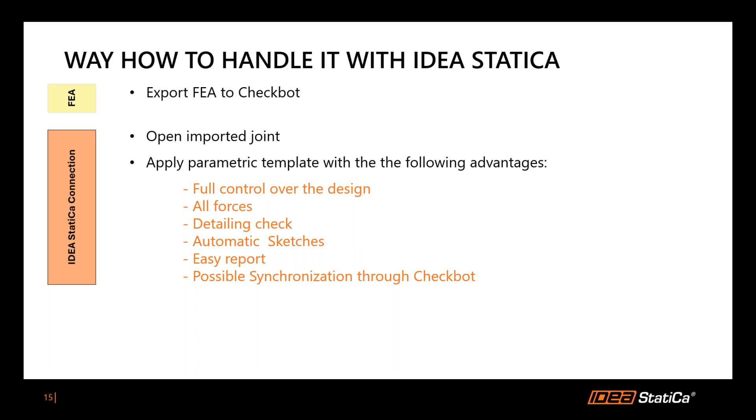We can export the structure to Checkbot, and now we open the imported joints and apply our templates with the following advantages: we have full control over the design, we have all the forces in the joints, we have detailing checks also included, we even have automatic sketches in our application, we can easily create a report, and of course we have possible synchronization through Checkbot if any changes in the structure appear.

And regarding post-processing, we export the connection report very easily. For the checkers and for the 3D CAD detailers, we can export either .ideacon for viewer, or we can even create an IFC file to see the position of the joints and how they look.

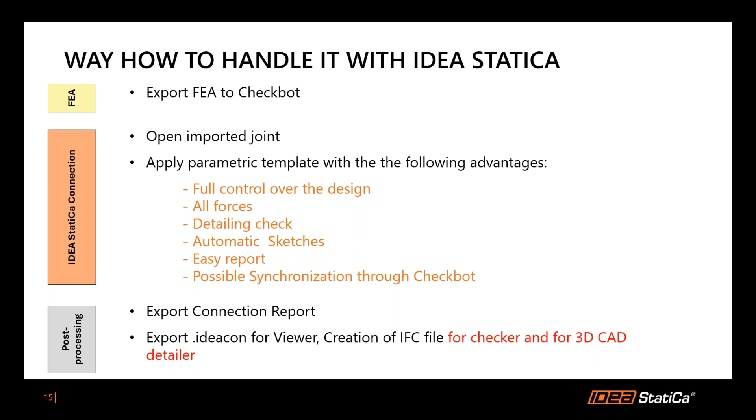And now I will show you how it works in IDEA StatiCa. So let's go out of the presentation and jump directly into the software.

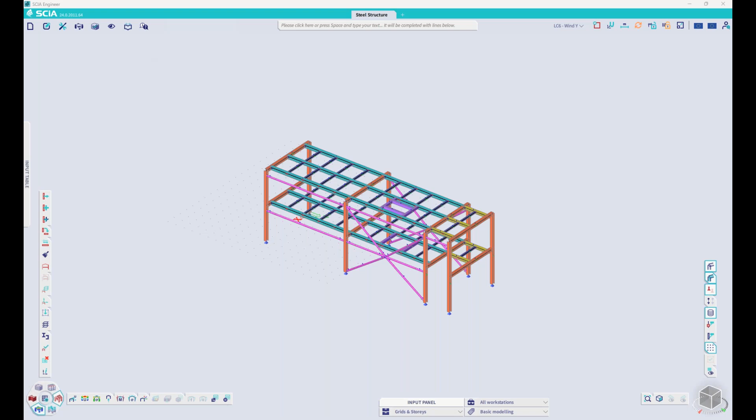So I have prepared a small structure in SCIA Engineer. It's already computed, so we will jump into the IDEA StatiCa Checkbot. And here it is - you see the whole structure is imported into IDEA StatiCa Checkbot with all these joints we have here in the tree.

Let's start with, for example, this joint. So I will open it. It takes some minutes, but it's here already.

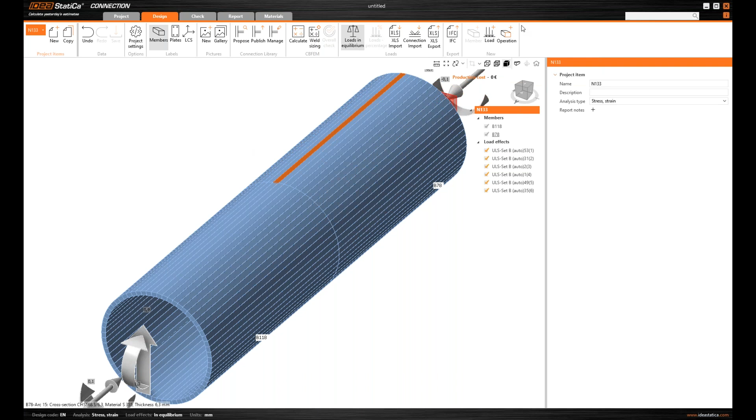And I have two possibilities. The first, standard possibility, what we had before version 24.1, we applied a standard operation to it. So I will show it only as an example of how to make it in the standard way.

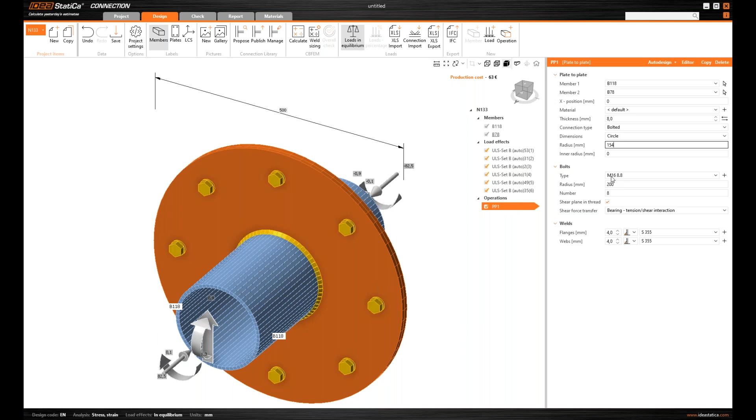And here I will change it a little bit. So, thickness 8, then here I will put 154. Here I will add the bolts with diameter 12. Radius 119, and here number of bolts, 6 bolts.

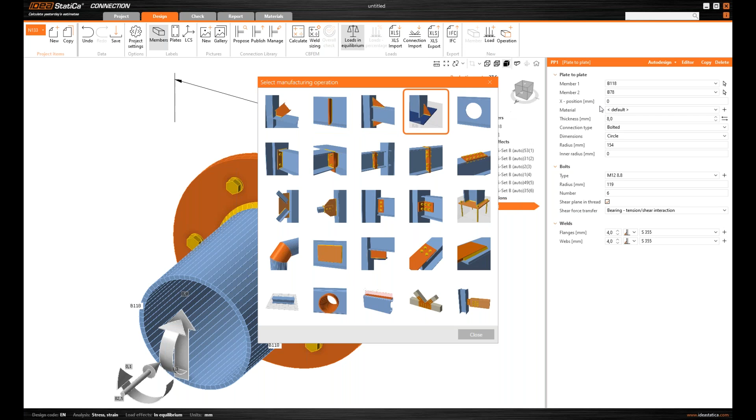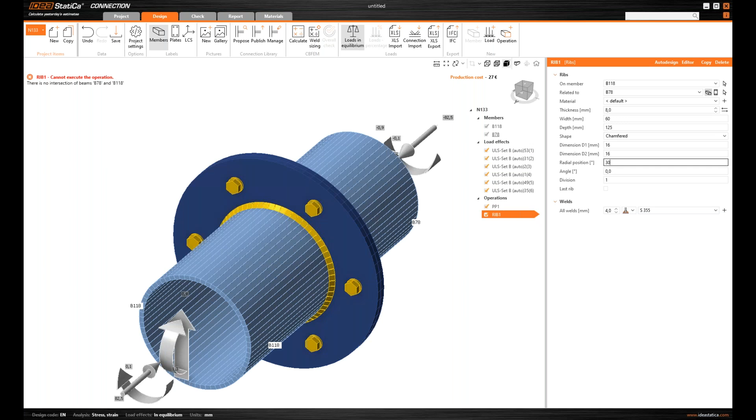So then I have to put another operation. This is the rib, and it will be here again, changing the plate. Here we can leave 80, 125, chamfered, triangle, chamfered, dimension 16, 16, 30, and 360.

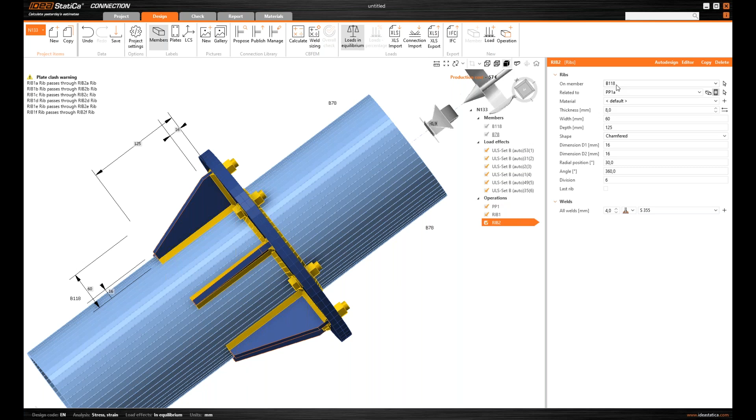It's here, and here we have to change it to the plate. So this one, and here number 6 - 6 ribs on one side, and then for the other side we will copy it and put it on the other side with the plate.

So this is the standard possibility we had before version 24.1, and it takes some minutes. For example, I measured it, and it took me about 1 to 2 minutes to create these 3 operations.

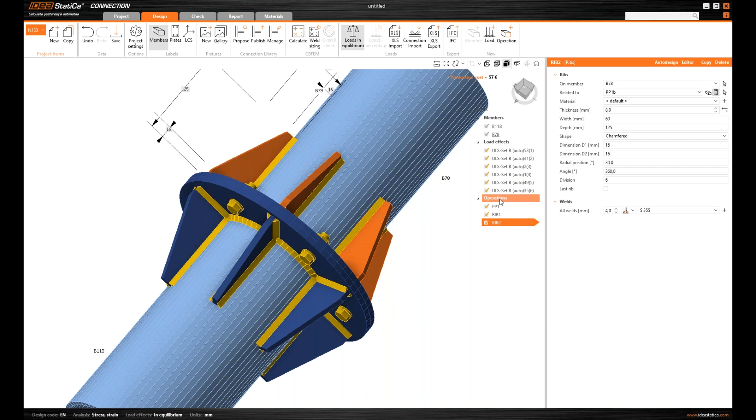Now I will delete it, and I will show you the other possibility which we have prepared for standard connections. A new window opens, and what's important, we now have a tab with a possibility to check the parametric design.

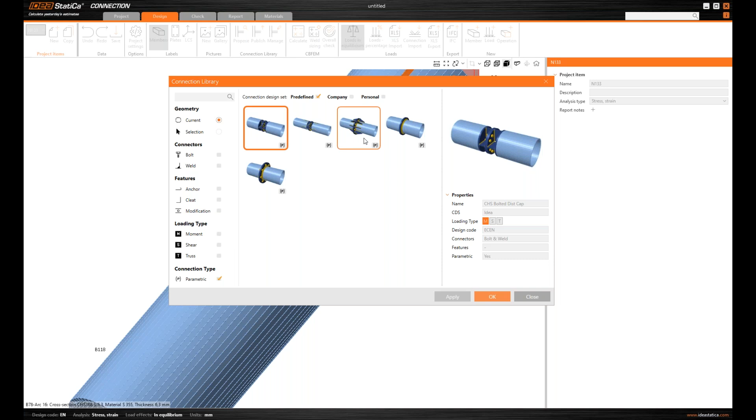In this case, we have some standard connections which can be used with this parametric design. And I will only change the diameter of the bolts. The whole joint was created and designed with one click.

Now, of course, for these operations we have some possibilities. You can see here in the tab on the right side we can change the thickness of the plates. For example, we had 8 millimeters before, and the number of bolts was not 8 but 6. The stiffener depth was 125, as I already added before, and the rest is the same as before.

What's the difference between the operations I had done before and these 3 operations we have right now? The difference is that you are not able to access these operations in the right tab - it's grayed out. So all you can do is apply these parts in the tabs; these are the items you can change, and the rest are not possible.

If there's a need to change something else, for example the welds, they can be accessed in this 3D window. So here you can change, for example, the welds to 5 millimeters, but nothing else.

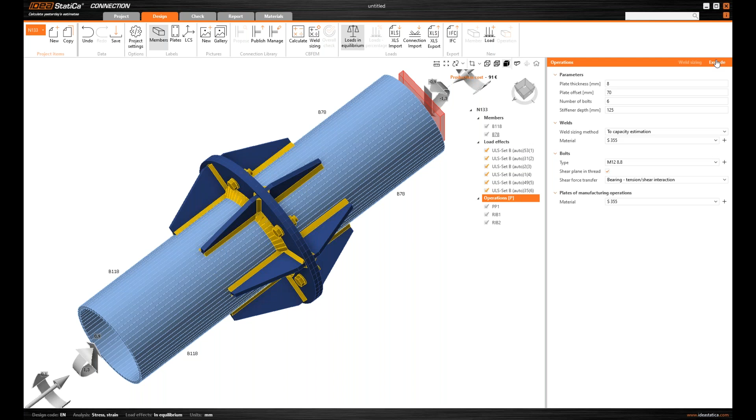In that case, we have done it, and now you see these three operations are accessible and you can change everything you want.

So this is the one example what I wanted to show it to you. Now I can save it. Eventually I can make the computation, but it's not necessary. Maybe I will do it.

For the calculation, if in case you have a lot of load effects, maybe in the tree you have 20, 30 load cases, there's also a possibility we added before: calculate load extremes. In that case, you can see only these 4 load cases are important for this joint. So I will calculate it, and in the meantime, I will show you how this calculation is prepared.

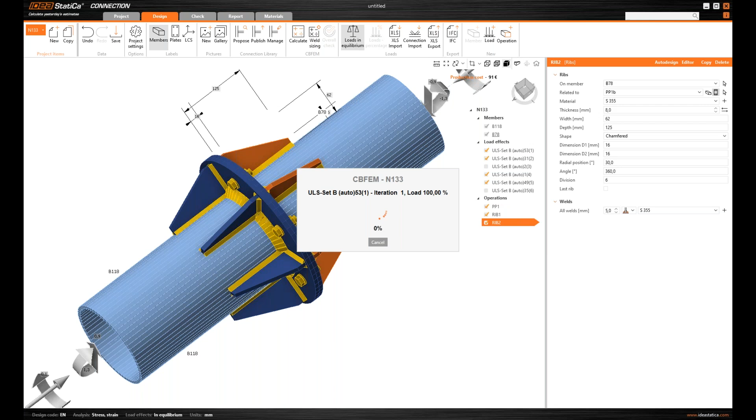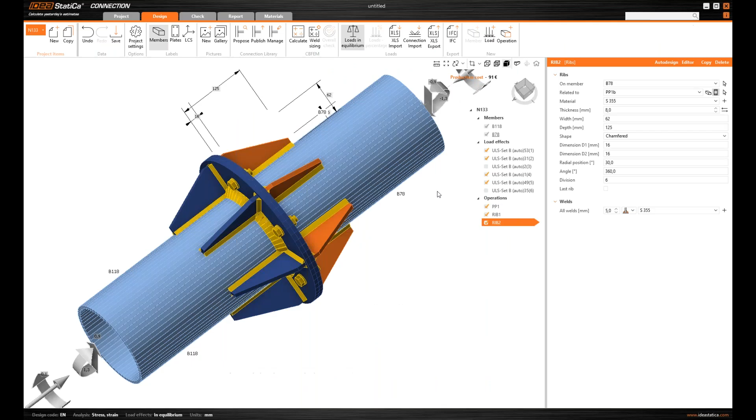We have here on our web pages a knowledge base article called the Load Extreme section. According to these formulas, we are computing the extreme loads which are significant for each joint you are calculating. So you can use this button, what I showed before, to select only the important load cases and make the calculation.

So, okay, it's done. I click on save and close it. So let's go to another joint. For example, I will select this one. This is the footing. Open.

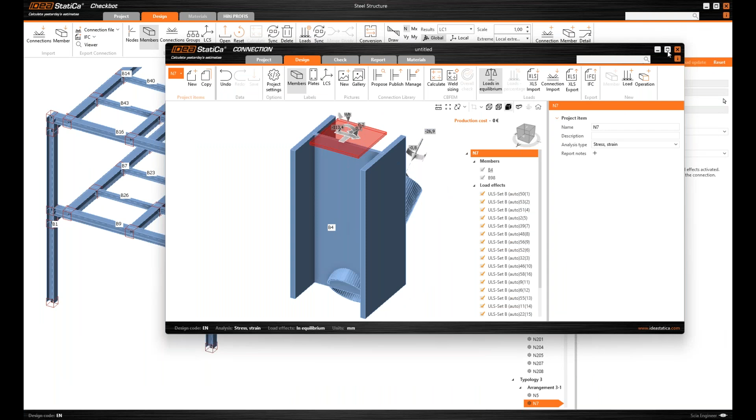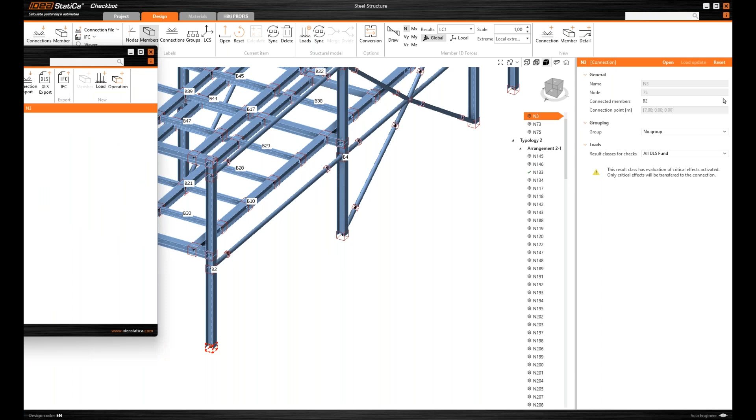So it's here, and again I will try to apply our parametric template. So I will click on parametric. Oh sorry, I took not the correct one because we have others. Not for every joint we have this - all the parametric design is not prepared, but I will talk about it a little bit later. So I will do this simple column and click on propose.

And again, click on parametric, and you can see we have more than one here. I will select, for example, this one. Okay. And well, we can leave it as it is.

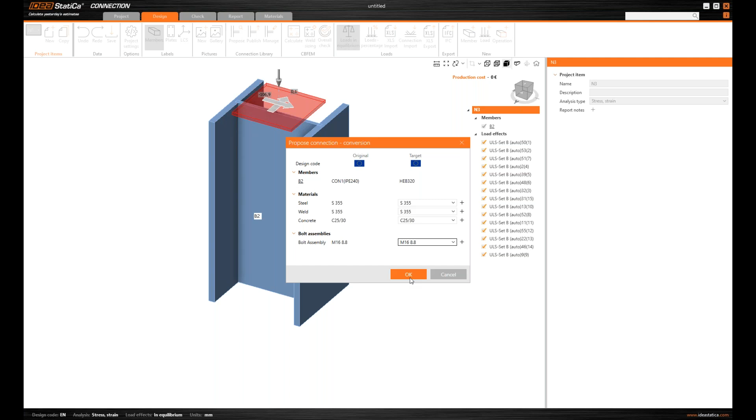So you can see here are much more operations needed to create this footing, so it's really easier to prepare something like that. And here, for example, I can click on widener at web. That means that it will disappear and we can compute the joint as it is right now.

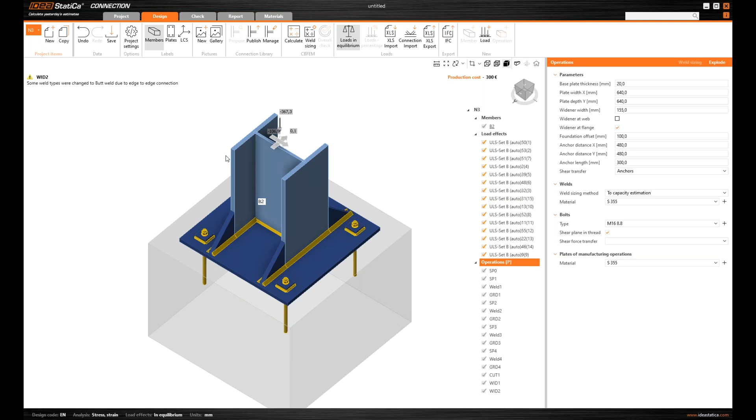In case, as I spoke before, we want to change something, I will explode it again. And for example, we have here these washers with the thickness of 20 millimeters.

Next, a very useful feature what we have right now: you can select using the control button and mouse. You can select all the washers - this one, this one, this one, and the other one. And here I can, at one click, change the thickness of these plates from 20 to 16 millimeters, for example.

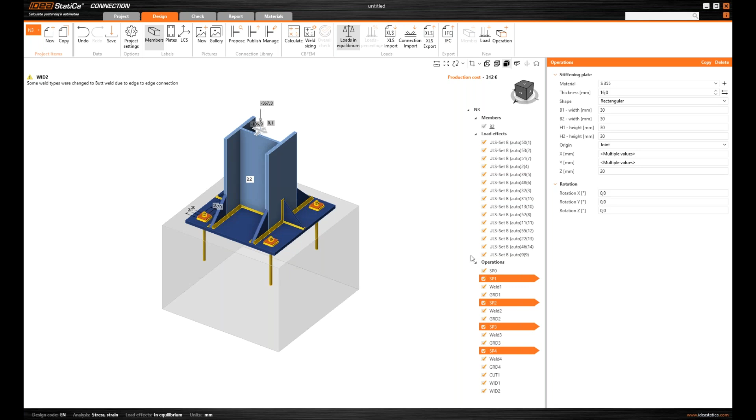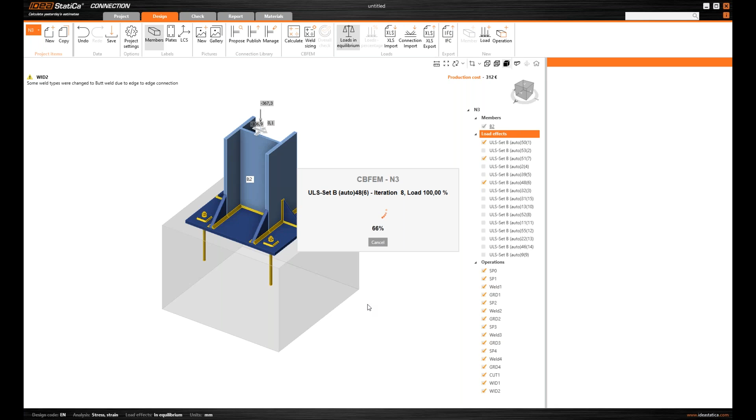So what we would like to show you is what's behind the parametric design, where you can create your own standard connections. We have about 50 parametric standard connections in our software, but you can create also your own.

And how to do so? Maybe I will save it. And how to do so? Close it, and let's go to the

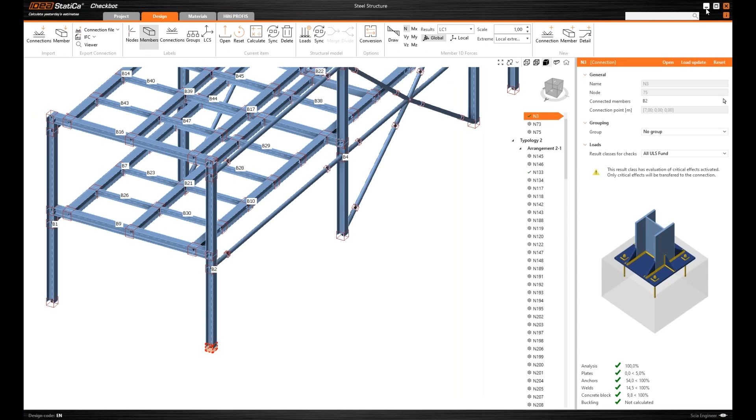Here to this application, and if you click on the preferences, you can click on the developer mode and enable the developer tab in the ribbon. Save. So let's go again to our checkbot, and we will try to show you how it works if we have the parametric developer mode enabled.

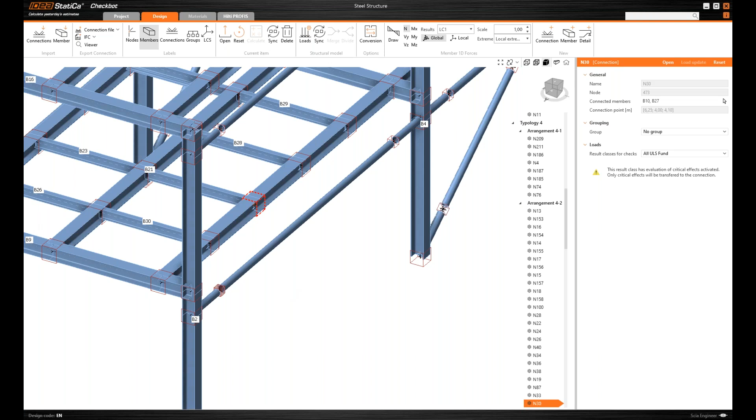So we will open this joint, for example. So here, and we will apply again one of the standard connections with parametric design. This is this one. I can change it, for example, here.

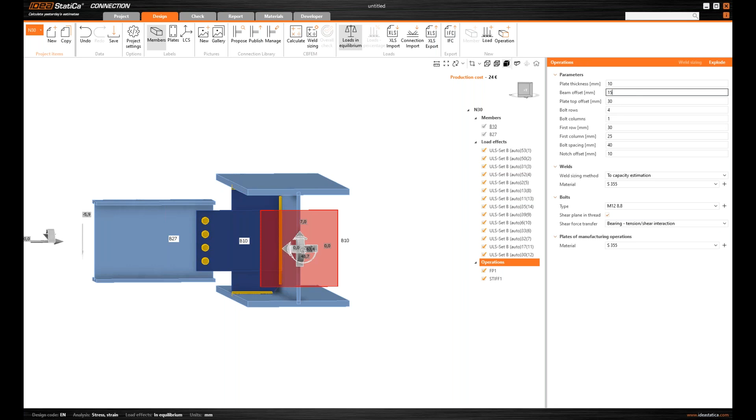And you can see we have here a thin plate. Maybe what we can do is change the offset to 15 millimeters. Yeah, you can see everything happened. And now what's the difference to the standard appearance of the connections.

We have here the developer tab, and in the developer tab right now, you can see the parameters which are responsible for these operations we have here in the 3D model. So it means that right now we have here parameter thickness 10 millimeters. I can change it, make it, for example, 12 millimeters, and click on Set to Model. Then if I go here, you maybe noticed it changed the thickness to 12 millimeters.

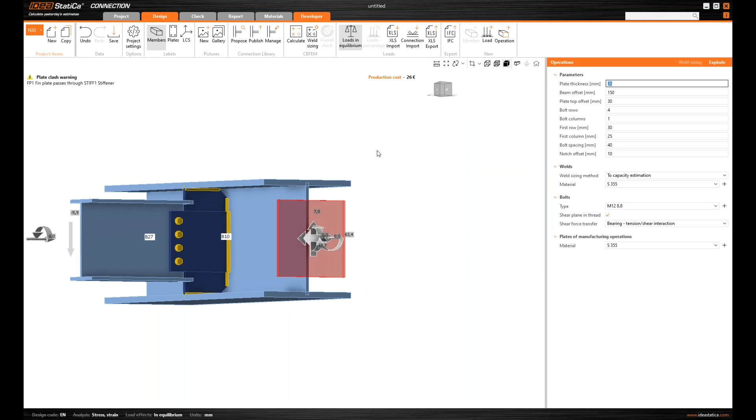And if I go back to design, here you can see the number change from 10 to 12. So this is the way how you can create your own standard connections according to the rules you have in your company and so on.

And for this, we have again small hints for you, and you can find it on our web pages. If you go to tutorials, products, field, and here IDEA Open Model API, you can see here two tutorials. The first one is parametric design in IDEA StatiCa connection basics, and the second one is the same with advanced.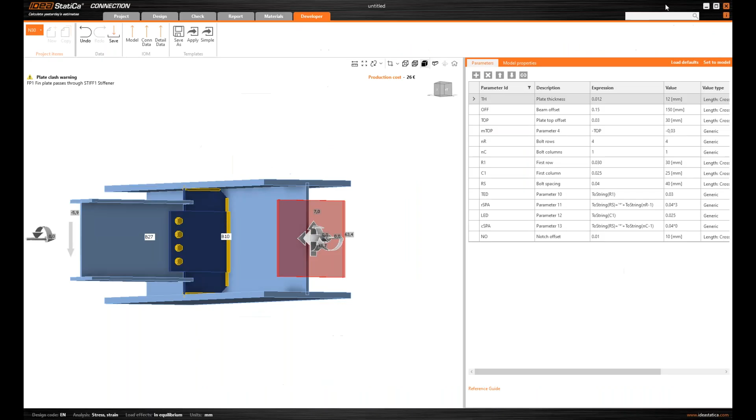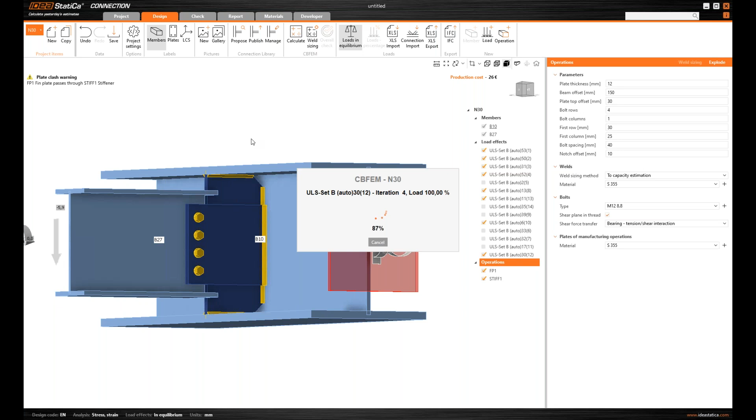And here you can learn all about these functionalities, how to create your own standard connections using the parameters in IDEA StatiCa. So let's go back to our example. We can again make the computation, calculate all, and click calculate. So everything is okay. We can again click on save and close it.

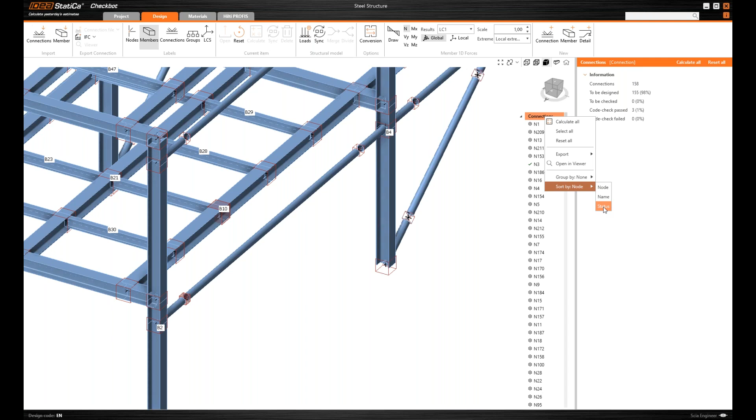So now I will show you another feature we have added to our application. Right now I will click with the right click mouse on none and click here sort by status. And now you can see the first rows are the joints we have designed and calculated. Yes, these three are done by me in the time.

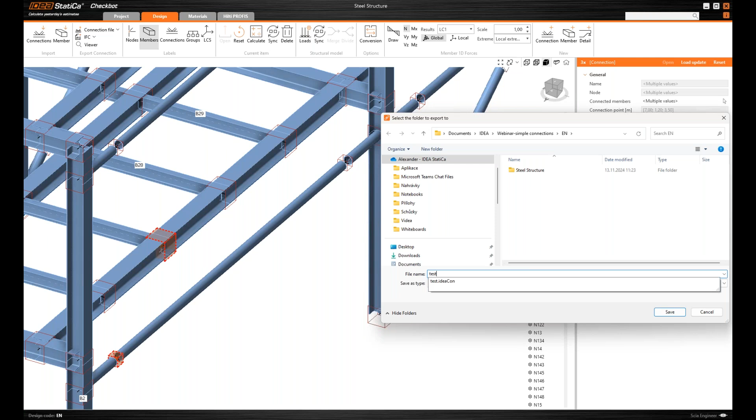And now we have again the possibility, clicking control, select all three joints, click with the right mouse button and click on export. I will click on connection, and maybe here put 'test.' Doesn't matter what name I select. And the same I will do for IFC, and make the same name test. So, save.

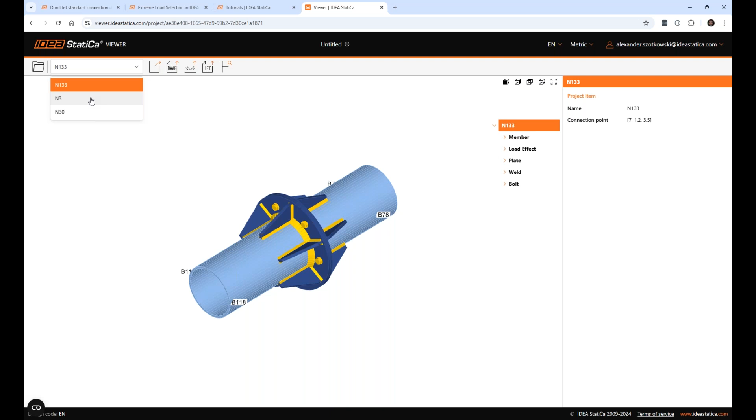And now, what we can do with these files. First, I can click on viewer and select these multiple files with connections. And you can see here we have all three joints in one file, and you can send it to your detailer to look at it.

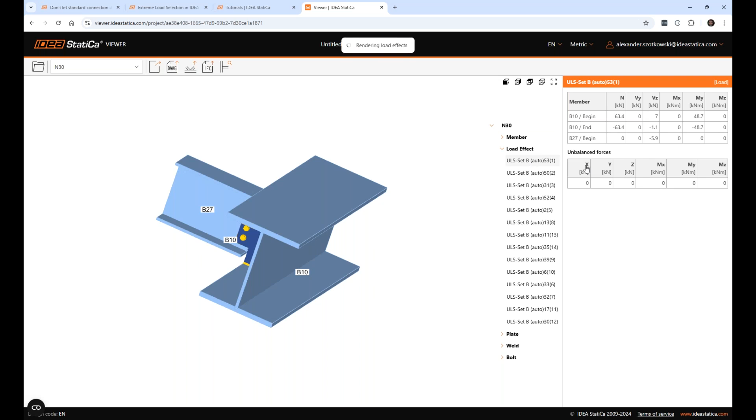It's even with the load effect, so if you click on it, you can see here the load effects we have used for the computation of the joint. So this is the one possibility of what you can do with this file.

And the second one, we have also the... I have to look at it. Cannot find it, sorry for the delay. I do not have it here. Maybe just a moment, please. Excuse me for the delay. I have put it on the other. Just a moment.

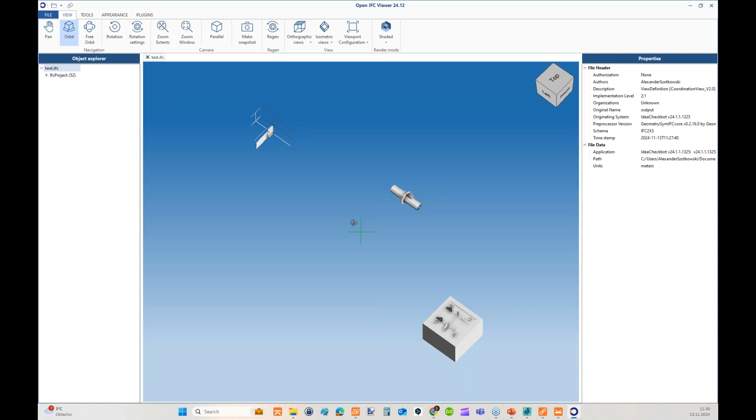So, and now we will look at the file with IFC. And now you can see here we have all three joints we have created, and they are even correctly positioned in the 3D. So you can see here our three joints we have here.

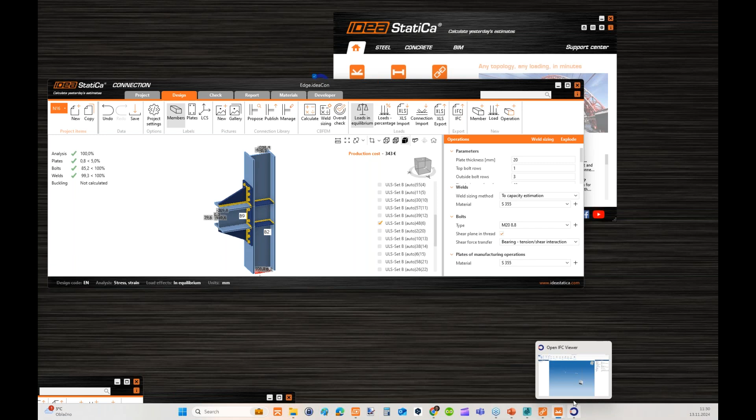Yeah, so it depends how we want to look at them. So, and this is the thing what I wanted to show to you today, and I will pass back my word to Andrzej.